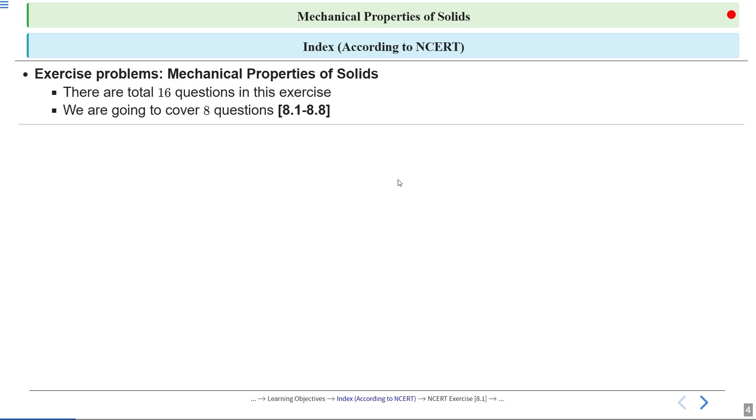A steel wire of length 4.7 meter and cross-sectional area 3.0 into 10 raised to the power minus 5 meter square stretches by the same amount as a copper wire of length 3.5 meter and cross-sectional area of 4.0 into 10 raised to the power minus 5 meter square under a given load. What is the ratio of the Young's modulus of steel to that of copper?

Let's see the solution. So let's start by listing all the information given in the problem. First, the length of the steel wire is given as 4.7 meters. Area of cross section is 3.0 into 10 raised to the power minus 5 meter square. Length of the copper wire is 3.5 meters. Area of cross section of the copper wire A2 equal to 4.0 into 10 raised to the power minus 5 meter square.

Change in length delta L1 is equal to delta L2 is equal to delta L. It means both wires stretch by the same amount, so the change in length delta L is the same for both. Alright, let force applied in both the cases be F,

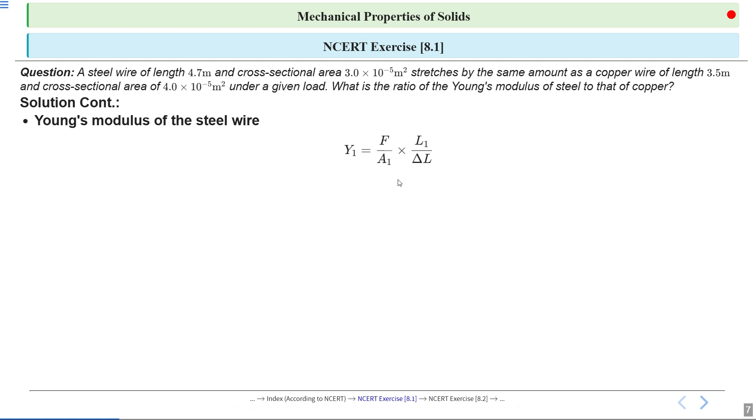and for the steel wire the Young's modulus Y1 is given by F divided by area into L1 divided by delta L. So when we substitute the values in the formula of the Young's modulus, you will get the answer. Formula for Young's modulus for the steel wire Y1 is equal to F divided by A1 into L1 divided by delta L. So substituting the given values for the steel wire, we have Y1 equal to F into 4.7 divided by 3.0 into 10 raised to the power minus 5 into delta L.

Young's modulus of the copper wire. So the approach is same. Y2 equal to F divided by A2 into L2 divided by delta L. So now again substitute the values for the copper wire. We get Y2 equal to F into 3.5 divided by 4.0 into 10 raised to the power minus 5 into delta L. So now we have two equations, first and second.

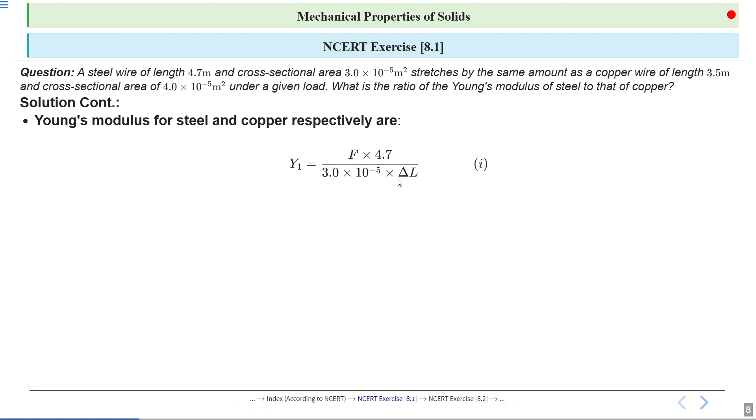Alright, so Young's modulus for steel and copper wire respectively are Y1 equal to F into 4.7 divided by 3.0 into 10 raised to the power minus 5 into delta L, and Y2 equal to F into 3.5 divided by 4.0 into 10 raised to the power minus 5 into delta L. So we have two equations, equation first and equation second.

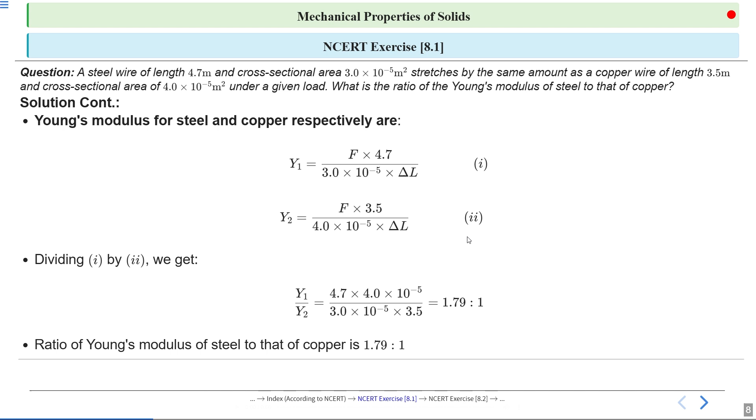So dividing first by second, we get Y1 upon Y2 is equal to 4.7 into 4.0 into 10 raised to the power minus 5 divided by 3.0 into 10 raised to the power minus 5 into 3.5. So solving this calculation, you will get 1.79 ratio 1. This means steel is about 1.79 times stiffer than copper under these conditions. So the ratio of the Young's modulus of steel to that of copper is 1.79 to 1.

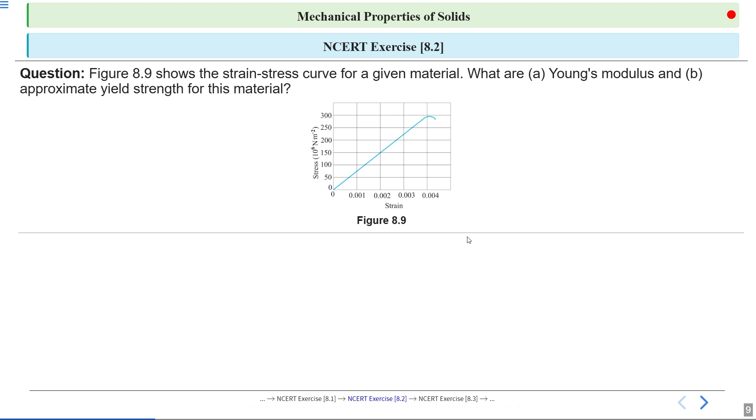Figure 8.9 shows the strain stress curve for a given material. What are the Young's modulus, and approximately the yield strength for this material? Let's see the solution.

So let's begin by solving part A of the question, which asks for Young's modulus. From the graph, we can see that when the stress is 150 into 10 to the power of 6 newtons per square meter, the corresponding strain is 0.002. The formula for Young's modulus is Y equal to stress divided by strain. Here Y stands for Young's modulus, stress is the force per unit area in newtons per square meter, and strain is the change in length divided by original length.

So now let's substitute the values from the graph into the formula. We have Y equal to 150 into 10 raised to the power 6 divided by 0.002. Solving for Young's modulus, when we calculate this, we get Y equal to 7.5 into 10 raised to the power 10 newton per meter square.

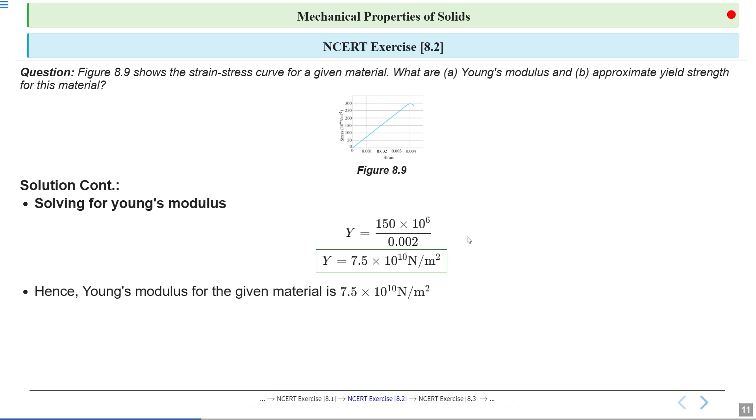So we can say Young's modulus for the given material is 7.5 into 10 raised to the power 10 Newton per meter square.

Now let's move on to part B of the question. Here the question asks about the approximate yield strength of the material.

Yield strength is defined as the maximum stress a material can sustain without crossing its elastic limit. So looking at the graph, we can see that yield strength is about 300 times 10 to the power 6 Newton per meter square, or we can say 3 into 10 raised to the power 8 Newton per meter square.

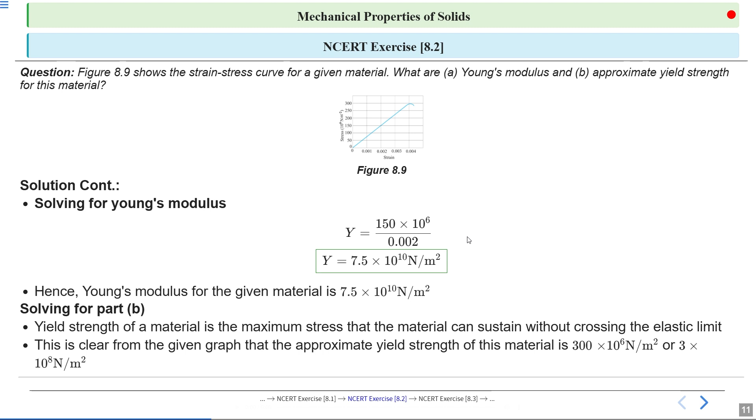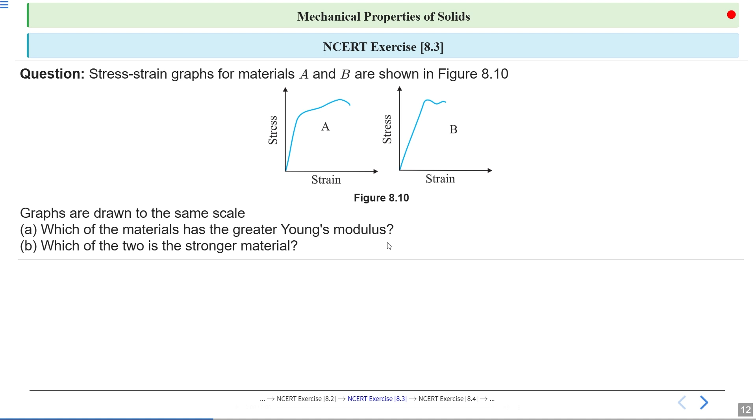A, which of the materials has the greater Young's modulus? B, which of the two is the stronger material? Alright, let's see the solution.

So first let's focus on part A of the question. For a given strain, we see that the stress value for material A is higher than for material B. Young's modulus is defined as the ratio of stress to strain, so Young's modulus is equal to stress divided by strain.

For a given strain, if the stress for a material is more, then Young's modulus is also greater for that material. So also material A has a steeper slope compared to material B. It has a higher Young's modulus. So Young's modulus for material A is greater than for material B.

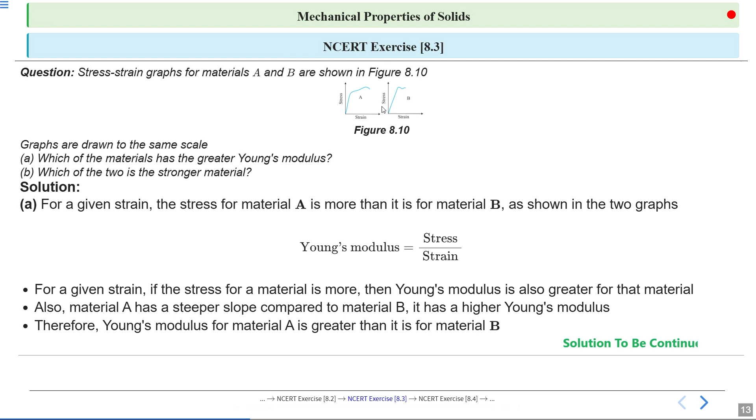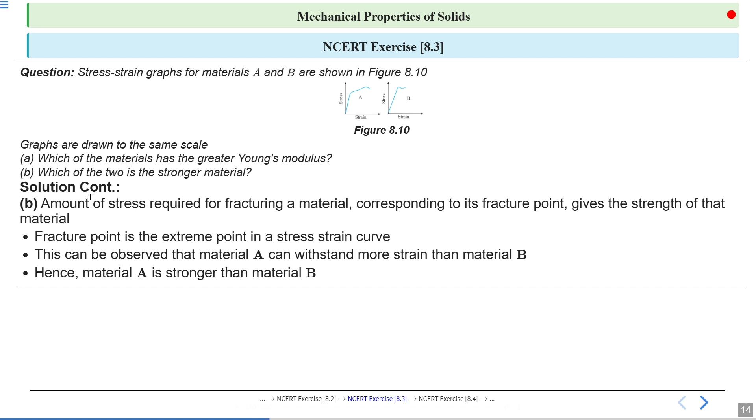Amount of stress required for fracturing a material corresponding to its fracture point gives the strength of that material. So fracture point is the extreme point in a stress strain curve. This can be observed that material A can withstand more strain than material B. Hence material A is stronger than material B.

Read the following two statements below carefully and state with reasons if it is true or false. A. Young's modulus of rubber is greater than that of steel. B. Stretching of a coil is determined by its shear modulus.

Let's see the solution. First, let's focus on statement A: Young's modulus of rubber is greater than that of steel. We will analyze whether this is true or false and then discuss the reasoning behind it.

So this statement is actually false. It's important to recognize that even though rubber can stretch a lot, that does not mean it has a higher Young's modulus than steel. Let's see why.

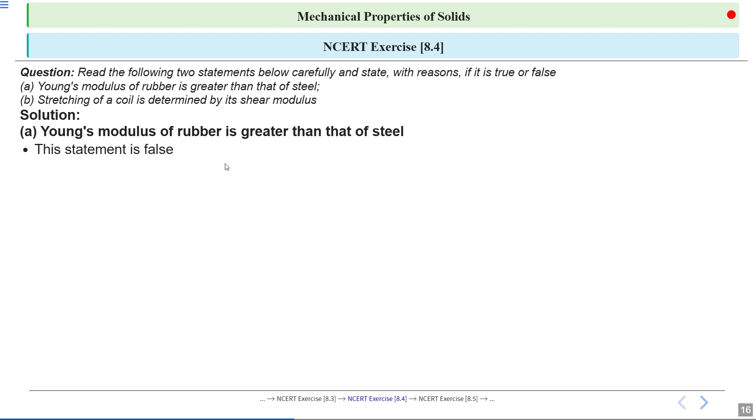So Young's modulus, often represented by the letter Y, measures how stiff a material is. The formula for Young's modulus is Y equal to stress divided by strain. So for the same amount of stress, rubber stretches much more than steel does.

That means the strain in rubber is much higher than in steel when you pull them with the same force. This shows us that rubber is much easier to deform than steel. Since Young's modulus is the ratio of stress to strain and rubber has a much larger strain for the same stress, its Young's modulus is actually much lower than that of steel.

So the more a material stretches, the lower its Young's modulus. So steel has a much higher Young's modulus than rubber. This means steel is much stiffer and resists deformation much more than rubber.

Now, statement B says that the stretching of a coil is determined by its shear modulus. So this statement is actually true.

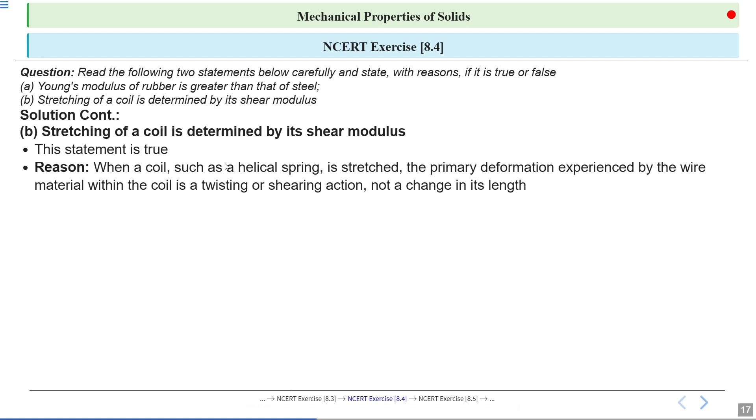Reason: when a coil such as a helical spring is stretched, the primary deformation experienced by the wire material within the coil is a twisting or shearing action, not a change in its length. The shear modulus, which we usually denote as G, tells us how resistant a material is to this kind of twisting or shearing.

Since the stretching of a coil involves a change in its shape due to these shearing forces, if you increase the shear modulus, the coil becomes harder to stretch. So shear modulus is the key elastic property that determines how much a coil will stretch under a given force.

So when you stretch a coil, the length of the wire itself does not change much. Instead, the shape of the coil changes because the wire twists. That's why the shear modulus is the most important factor in determining how much a coil stretches.

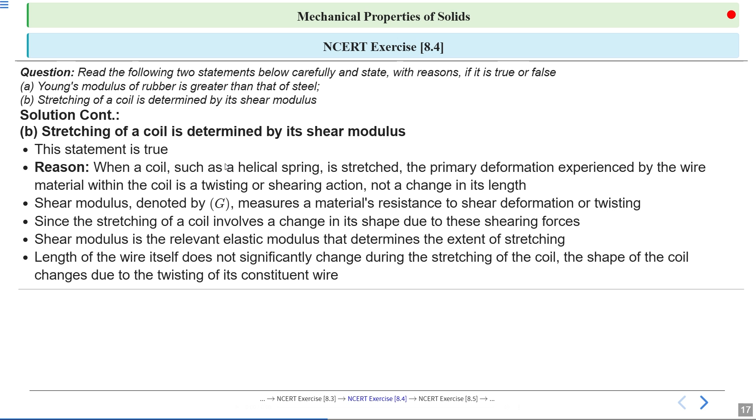Two wires of diameter 0.25 cm, one made of steel and the other made of brass, are loaded as shown in figure 8.11. The unloaded length of steel wire is 1.5 meter and that of brass wire is 1.0 meter. Compute the elongations of the steel and the brass wires.

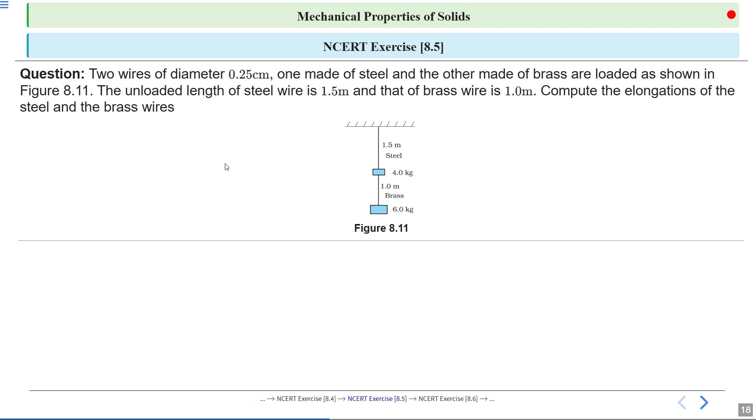Alright, let's start to solve this question. So let's start by listing all information given in the problem.

Diameter of both wires is 0.25 centimeters. Next, the length of the steel wire is 1.5 meters. Length of the brass wire is 1.0 meter.

Now, first let's determine the radius of each wire. Since the diameter is given as 0.25 centimeters, we divide by 2 to get the radius, which is 0.125 centimeters. Remember, the radius is half of the diameter.

So next, let's calculate the total force acting on the steel wire. The steel wire supports both the 4 kilogram and 6 kilogram weights. Look at the figure: we have 4 kilogram here, and then 6 kilogram. So the total mass is 10 kilograms, 6 plus 4.

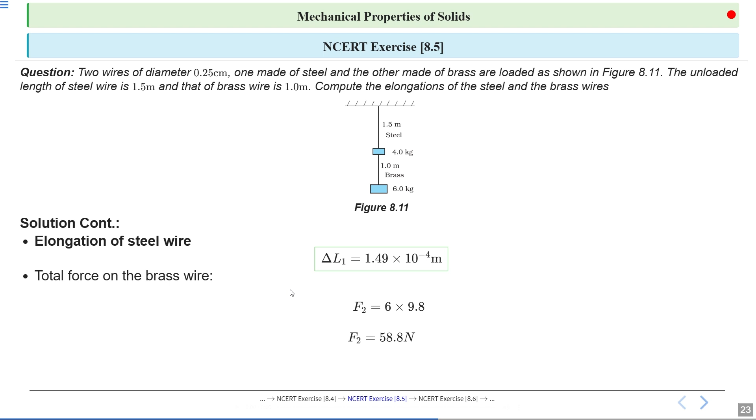Now, Young's modulus for brass, Y2 equal to F2 divided by A2, divided by delta L2 divided by L2, where delta L2 equal to change in length, and A2 equal to area of cross section of the brass wire.

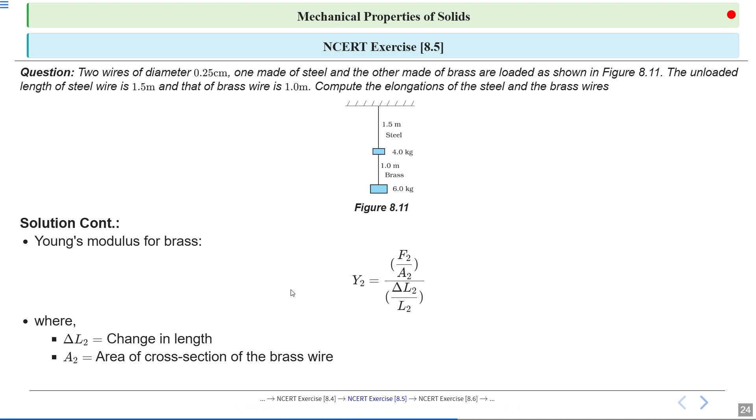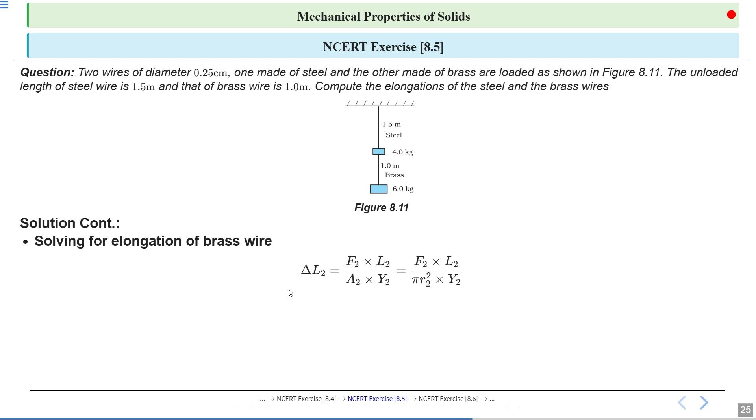Now let's focus on finding the elongation of the brass wire. The formula is delta L2 equal to F2 into L2 divided by A2 into Y2. So substitute the values: delta L2 equal to 58.8 into 1.0 divided by pi into 0.125 into 10 raised to power minus 2 whole square, into 0.91 into 10 raised to power 11.

Now solving for elongation of brass wire, so delta L2 is this one. Solving this, you will get delta L2 equal to 1.3 into 10 raised to power minus 4 meter. Elongation of the steel wire is 1.49 into 10 raised to power minus 4 meter, and elongation of the brass wire is 1.3 into 10 raised to power minus 4 meter.

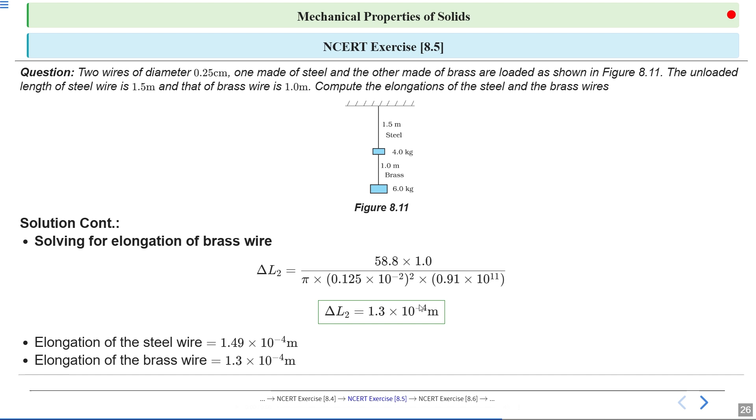Edge of an aluminium cube is 10 centimeter long. One face of the cube is firmly fixed to a vertical wall. A mass of 100 kilogram is then attached to the opposite face of the cube. The shear modulus of aluminium is 25 gigapascal. What is the vertical deflection of this face?

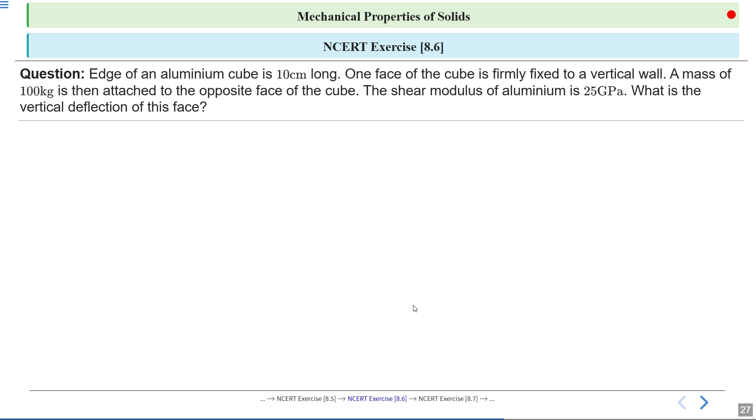So let's start by listing all the information given in the problem. First, edge length of the aluminium cube is 10 centimeters, and mass attached to the cube is equal to 100 kg. Shear modulus of aluminium is 25 gigapascal.

And we know the shear modulus, which is equal to shear stress divided by shear strain, or we can say F by A divided by shear strain, where F is applied force, which is equal to mg equal to 100 into 9.8, which is equal to 980 Newton. A is area of one of the faces of the cube, which is equal to 0.1 into 0.1, so solving this you will get 0.01 meter square.

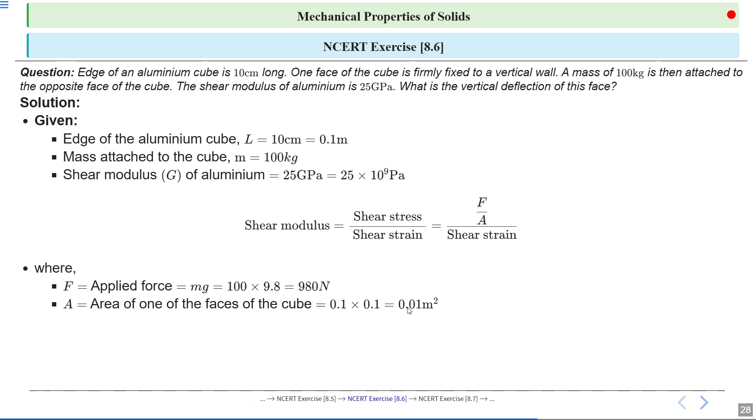Now recall what the shear modulus is, often represented by the letter G. So shear modulus equal to shear stress divided by shear strain, so G equal to F by A divided by delta L by L. When we rearrange, it will be FL divided by A into delta L, so delta L is equal to FL divided by AG.

So substitute the values and you will get delta L. It will be 980 into 0.1 divided by 10 raised to the power minus 2 into 25 into 10 raised to the power 9.

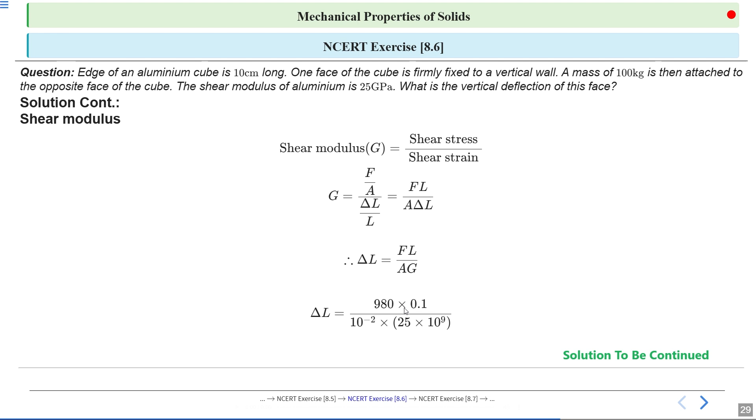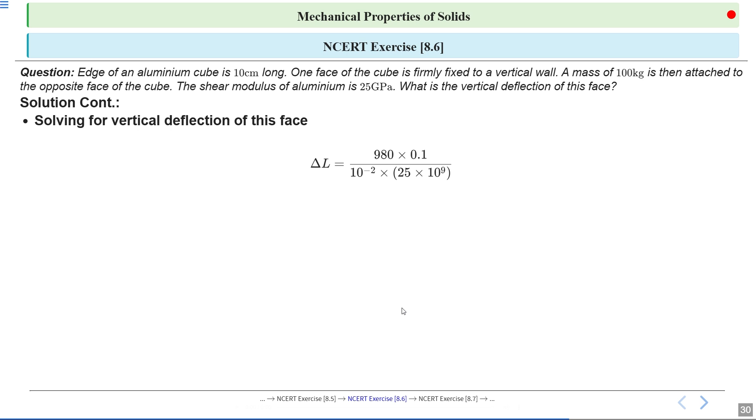Solving for vertical deflection of this face. So delta L is equal to 980 into 0.1 divided by 10 raised to the power minus 2 into 25 into 10 raised to the power 9.

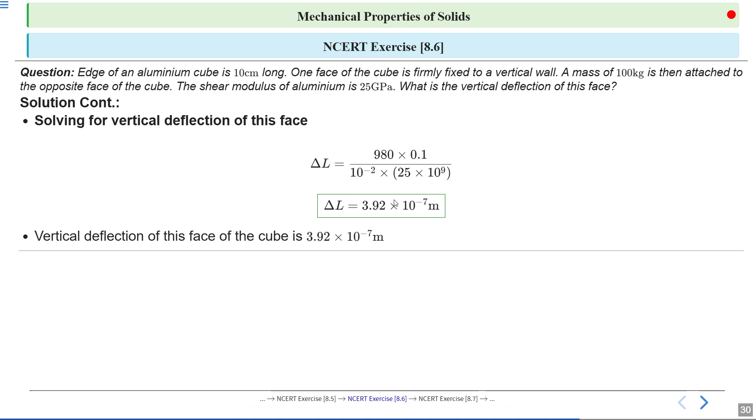So after calculating, we find that the vertical deflection is 3.92 into 10 raised to the power minus 7 meter. Vertical deflection of this face of the cube is 3.92 into 10 raised to the power minus 7 meter.

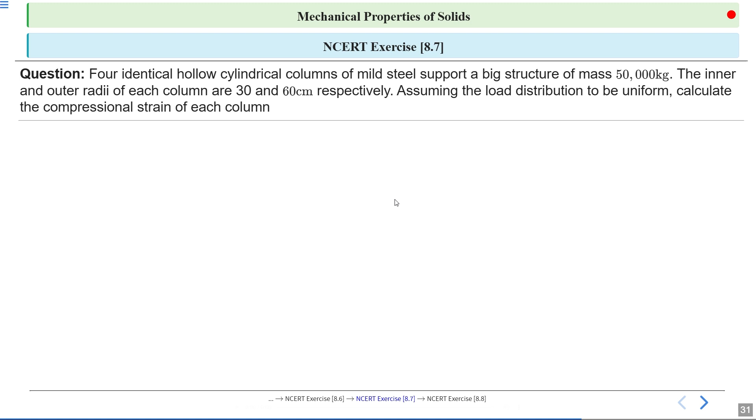Four identical hollow cylindrical columns of mild steel support a big structure of mass 50,000 kg. The inner and outer radii of each column are 30 and 60 cm respectively. Assuming the load distribution to be uniform, calculate the compressional strain of each column.

Let's see the solution. Let's start by identifying the information given in the problem. So mass of the big structure m equal to 50,000 kg and inner radius of the column r equal to

30 centimeter. Here we need to convert it 30 centimeter to meter. So just divide by 100, you will get 0.3 meter. Outer radius of the column r equal to 60 centimeter.

Again here we need to convert it in meter. So just divide by 100 and you will get 0.6 meter. Young's modulus of steel y equal to 2 into 10 raised to 11 Pascal.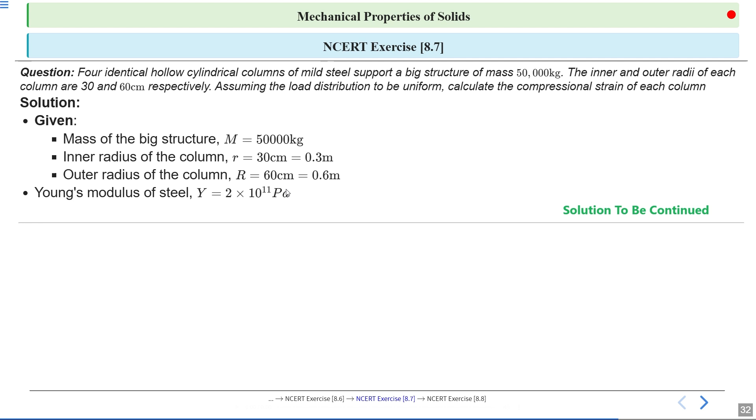Total exerted force F equal to mg. So just put the values 50,000 into 9.8.

So now since the load is distributed evenly across 4 columns, we divide the total force by 4 to find the force on each column. So F force column is equal to 50,000 into 9.8 divided by 4 is equal to 122,500 Newton.

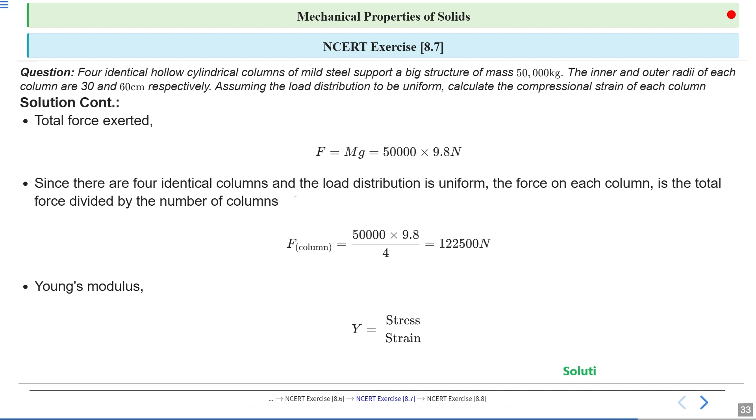So we know Young's modulus is stress upon strain. So first recall what strain means. Strain is the ratio of change in length to the original length and it's a measure of deformation. The formula we are using here is strain equal to F by A divided by Y.

So we know area equal to pi into r square minus r square. So just put the values, you will get pi into 0.6 whole square minus 0.3 whole square. So solving this expression, you will get

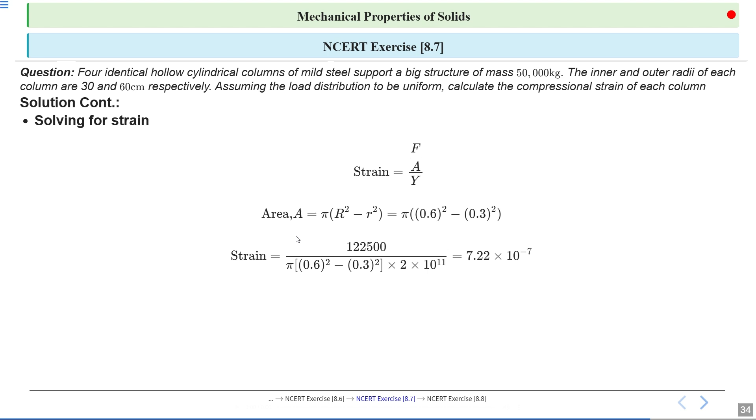122,500 divided by pi into 0.6 square minus 0.3 square into 2 into 10 raised to the 11. Solving this term, you will get 7.22 into 10 raised to the minus 7. Hence the compressional strain of each column is 7.22 into 10 raised to the minus 7. This means each column shortens by a teeny fraction of its length under the weight of the structure.

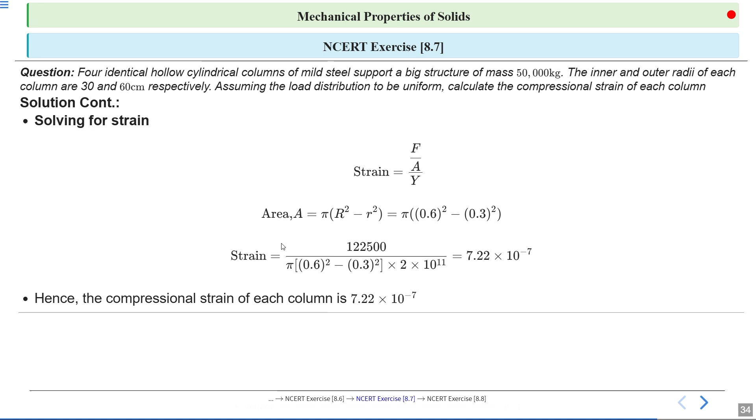A piece of copper having a rectangular cross section of 15.2 mm into 19.1 mm is pulled in tension with 44,500 Newton force producing only elastic deformation. Calculate the resulting strain. Let's see.

So, let's start by listing all information given in the problem. Length of the piece of the copper is 19.1 mm. So here we need to convert it mm to meter. So it will be 19.1 into 10 raised to the minus 3 meter.

Breadth of the piece of copper is 15.2 mm. Again here we need to convert it to meter. So it will be 15.2 into 10 raised to the minus 3 meter.

Area of the copper piece A equal to L into B. So substitute the values 19.1 into 10 raised to the minus 3 into 15.2 into 10 raised to the minus 3. So solving this, you will get 2.9 into 10 raised to the minus 4 meter square.

Then here tension force applied on the piece of copper F equal to 44,500 Newton. This is a significant force and it's important to note that the deformation is only elastic, meaning the copper will return to its original shape once the force is removed.

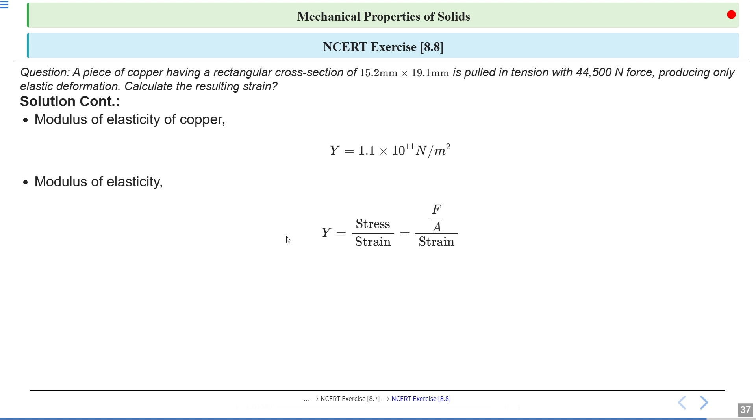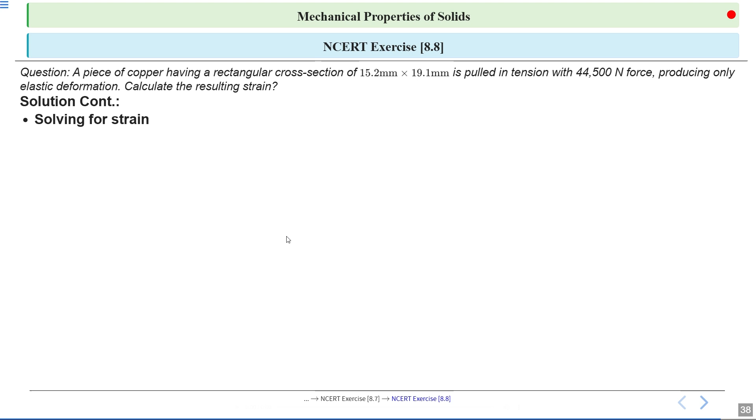So let's focus on what we are solving for, the strain. Strain is the measure of deformation. Strain equal to F divided by A into Y.

So substitute the values into the formula. So 44,500 divided by 2.9 into 10 raised to the minus 4 into 1.1 into 10 raised to the 11. So solving this, you will get 1.393 into 10 raised to the power minus 3.